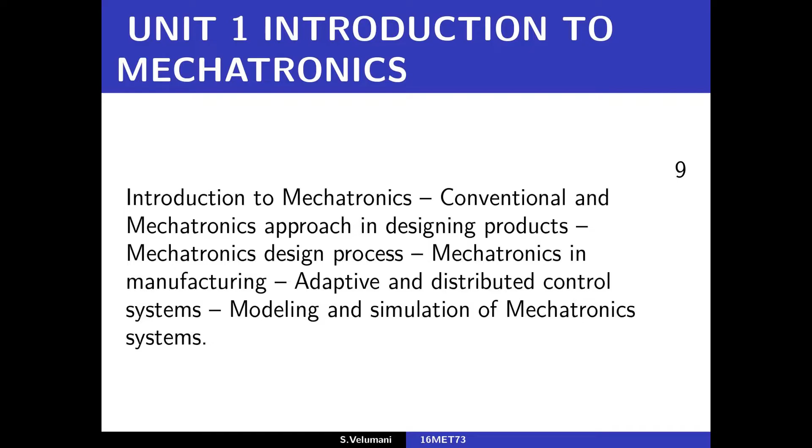Let us see the definition of mechatronics. Mechatronics is normally described as a synergistic combination of mechanics, electrical, electronics, computer and control, which when combined make possible the generation of simple, more economic and reliable systems.

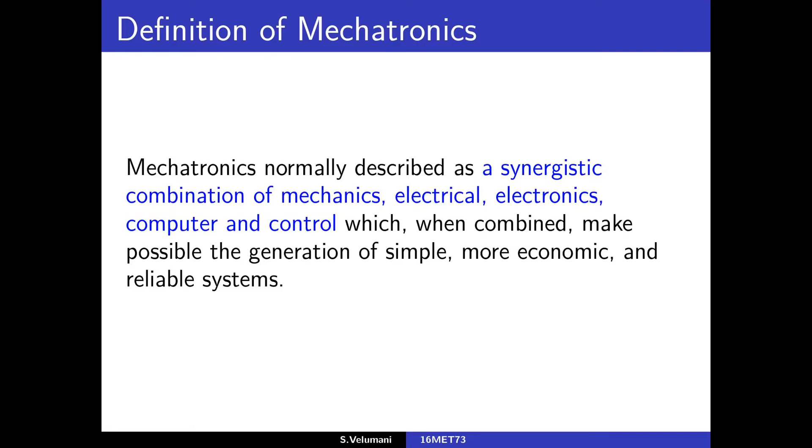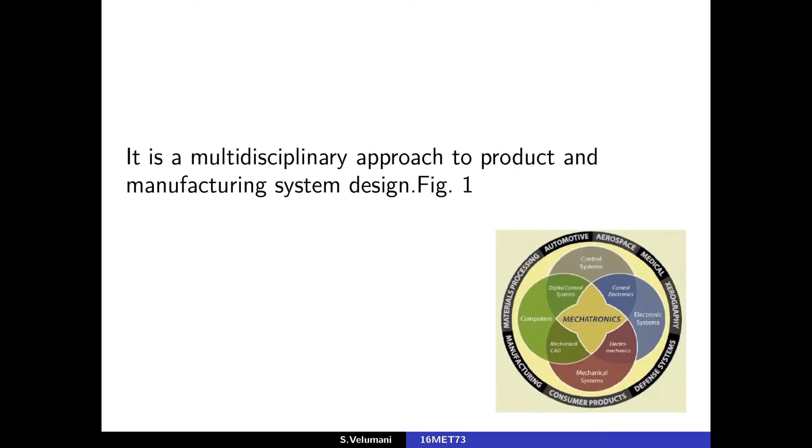The term mechatronics was first coined by Mr. Tetsuro Mori, a senior engineer of the Japanese company Yaskawa, in 1969. It is a multidisciplinary approach to product and manufacturing system design.

See picture 1. Mechatronics can also be termed as replacement of mechanics with electronics, or enhancement of mechanics with electronics.

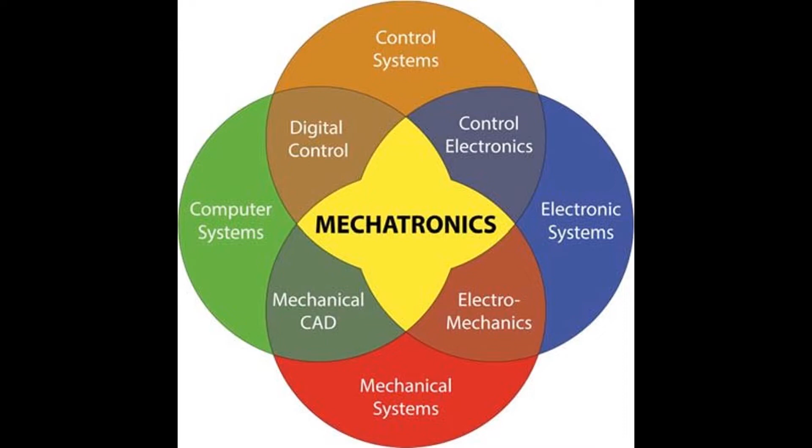For example, in modern automobiles, mechanical fuel injection systems are now replaced with electronic fuel injection systems. This replacement made the automobiles more efficient and less pollutant.

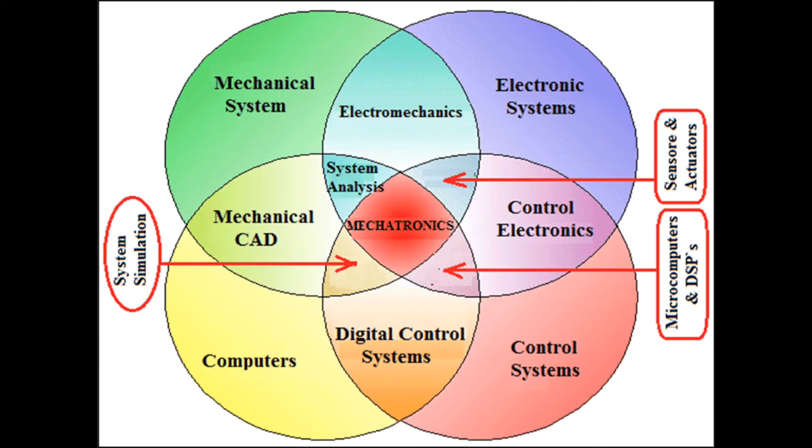With the help of microelectronics and sensor technology, mechatronic systems are providing high levels of precision and reliability. It is now possible to move in the XY plane of the work table of a modern production machine tool in steps of 0.0001 mm.

By employment of reprogrammable microcontrollers and microcomputers, it is now easy to add new functions and capabilities to a product or system.

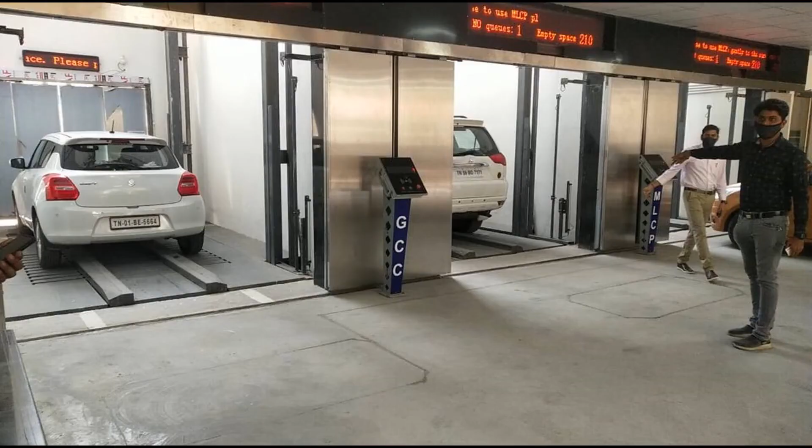Today's domestic washing machines are intelligent, and four-wheel passenger automobiles are equipped with safety installations such as airbags, parking or proximity sensors, anti-theft electronic keys, etc.

Mechatronics brings together areas of technology involving sensors and measurement systems, drive and actuation systems, and microprocessor systems, together with the analysis of behavior of the systems and control. Now you see the picture of basic elements of mechatronic systems shown on the screen.

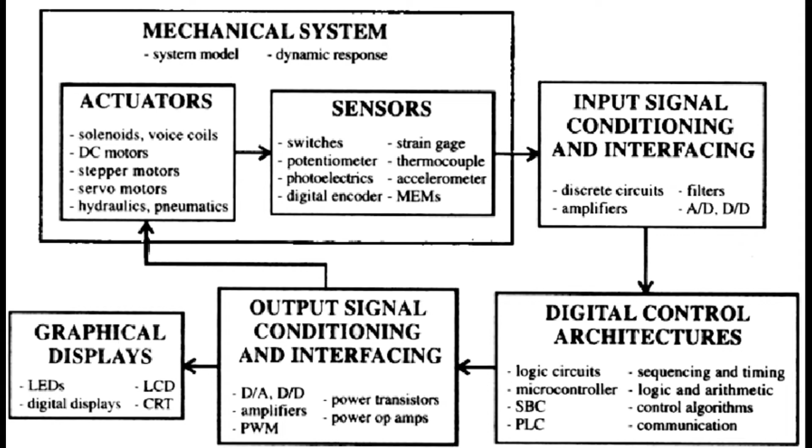Customers are demanding more variety and higher levels of flexibility in products. Due to these demands and competition in the market, manufacturers are striving to launch new or modified products to survive. This is reducing the product life as well as the lead time to manufacture a product. It is therefore essential to automate the manufacturing and assembly operations of a product.

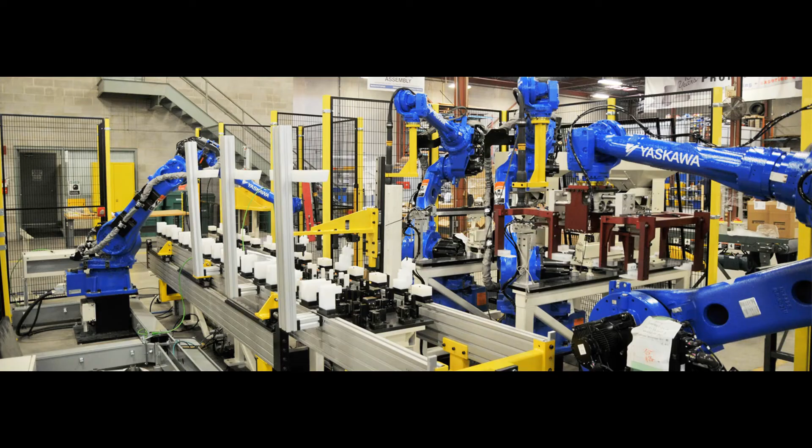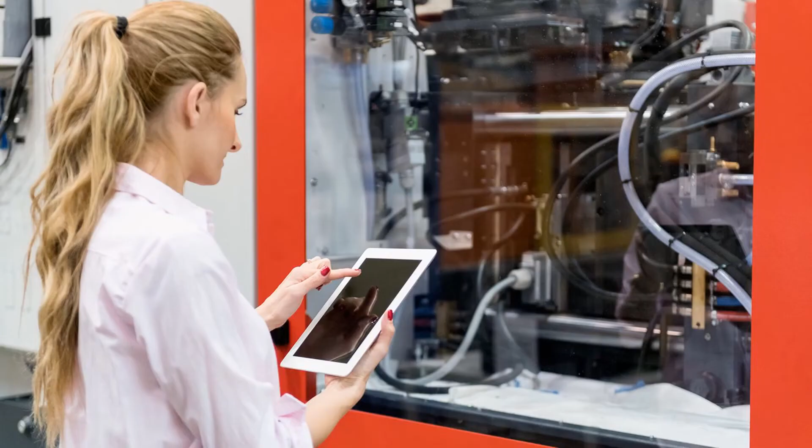In the design process, mechatronics concurrently employs the disciplines of mechanical, electrical, control and computer engineering at the stage of design itself. Mechanical discipline is employed in terms of various machines and mechanisms, whereas electrical engineering uses various electric prime movers.

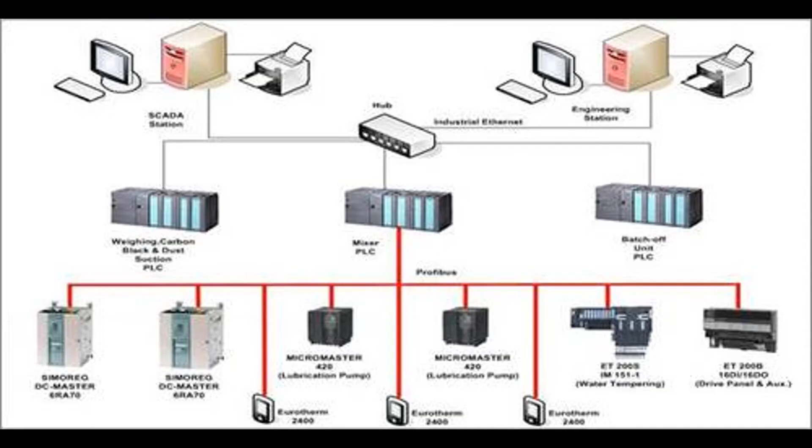Electrical engineering uses various electric prime movers, AC and DC servo motors, and other systems. Control engineering helps in the development of various electronics-based control systems to enhance or replace the mechanics of mechanical systems.

In the design process, computers are widely used to write various software to control the control systems, product design and development activities, materials and manufacturing resource planning, record keeping, market and other sales related activities.

Next, we will see the elaborate steps followed in the design process. There are some sequence of steps to be followed in designing a product or anything.

First, the need. Second, analysis of the problem. Third, preparation of a specification. Fourth, generation of possible solutions. Fifth, selection of a suitable solution. Sixth, production of a detailed design. Seventh, production of working drawings.

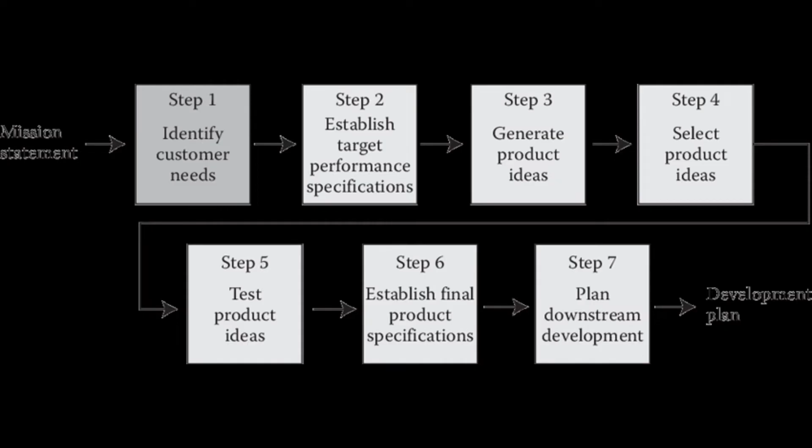First, the need. The design process begins with the need.

Second, analysis of the problem. The first stage in developing a design is to find out the true nature of the problem, that is, analyzing it. If the problem is not defined accurately, it can lead to wasted time on designs that will not fulfill the need.

Third, preparation of a specification. Following the analysis, a specification of the requirements can be prepared.

Subdivision 1: state the problem. Subdivision 2: any constraints placed on the solution. Subdivision 3: the criteria which may be used to judge the quality of the design. Subdivision 4: all the functions and desirable features required for the design.

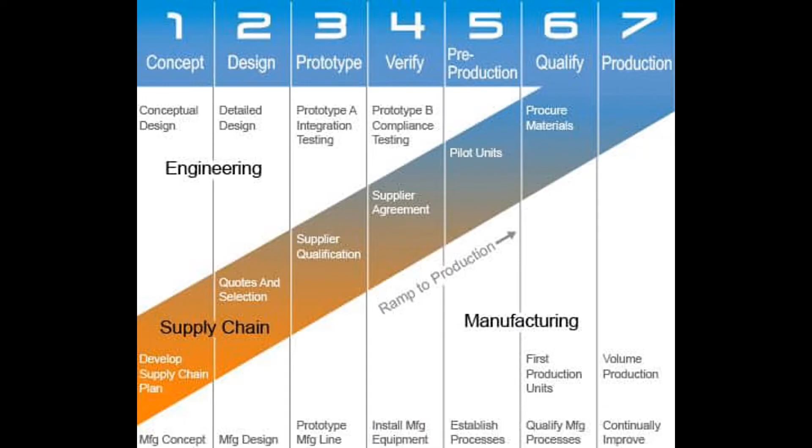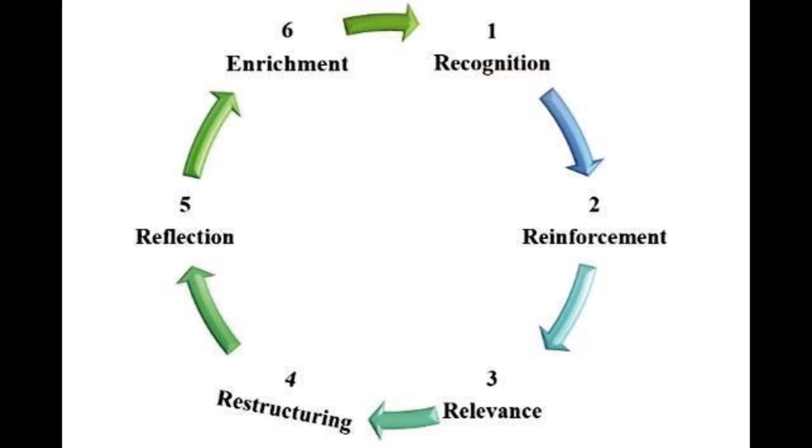Next is the fourth step: the generation of possible solutions. This may also be called the conceptual stage. Outline solutions are prepared, worked out in sufficient detail to indicate the means of obtaining each of the required functions, for example approximate sizes, shapes, materials and costs.

Fifth, selection of a suitable solution. The various solutions are evaluated and the most suitable one is selected. Evaluation will often involve representing the system by a model and then simulation to establish how it might react to inputs.

Sixth step, production of a detailed design. The details of the selected design now have to be worked out, including the production of prototypes or mock-ups in order to determine the optimum details of the design.

Seventh step, production of working drawings. The selected design is then translated into working drawings, circuit diagrams, etc., so that the item can be made.

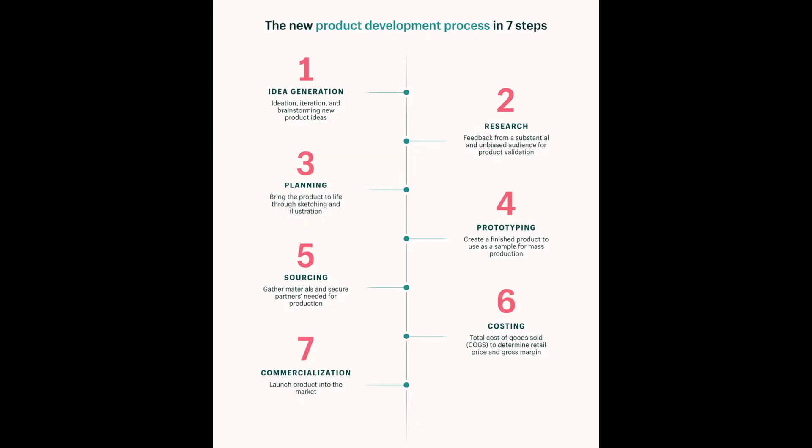Next, we will see the evolution levels of mechatronics. There are four levels: primary level mechatronics, secondary level mechatronics, tertiary level mechatronics, and quaternary level mechatronics.

In primary level mechatronics, electrical signaling and mechanical action are integrated at the basic control level, for example fluid valves and relay switches.

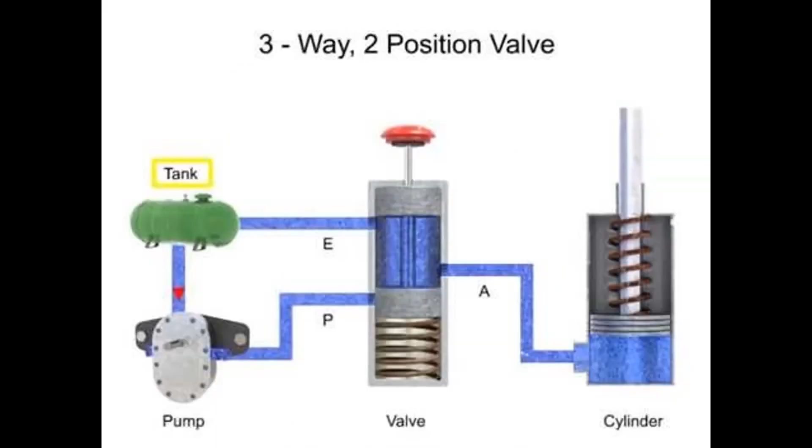In secondary level mechatronics, microelectronics is integrated into electrically controlled devices, for example a cassette tape player.

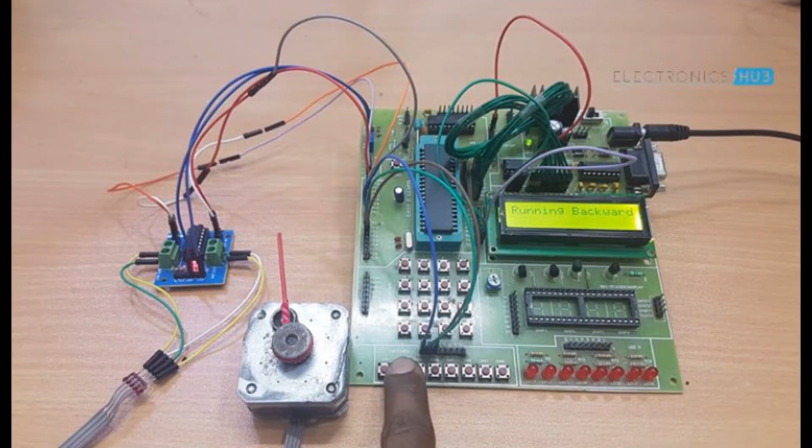Tertiary level mechatronics incorporates advanced control strategy using microelectronics, microprocessors, and other application-specific integrated circuits, for example a microprocessor-based electric motor used for actuation purposes in robots.

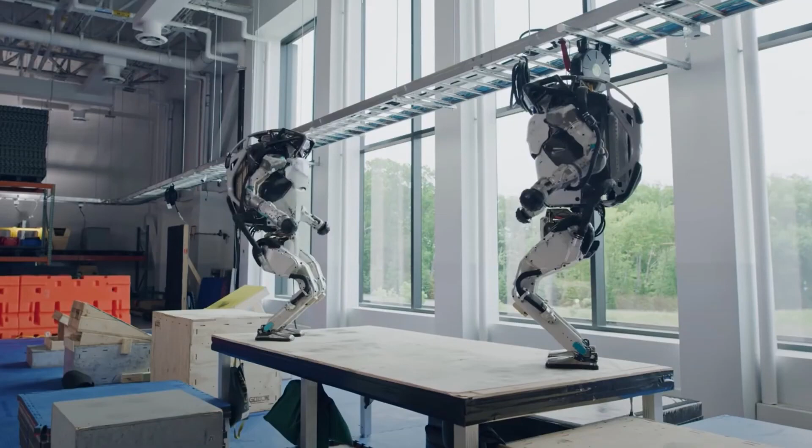Quaternary level mechatronics. This level attempts to improve smartness a step ahead by introducing intelligence, that is artificial neural networks and fuzzy logic, and fault detection and isolation capability into the system.

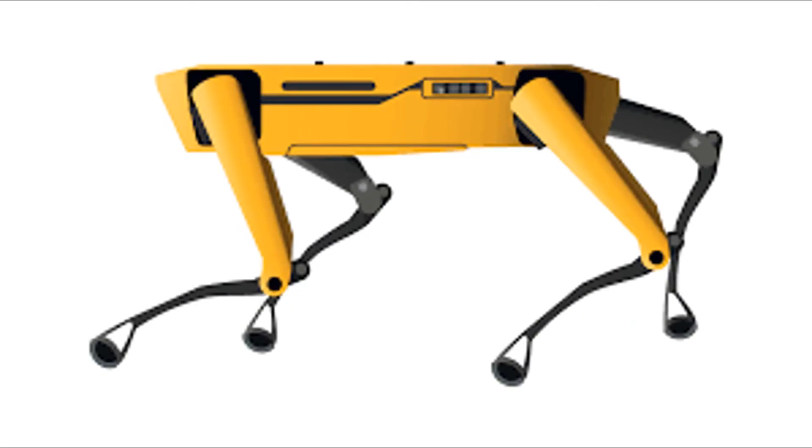Next, we will see the advantages of mechatronic systems. The products produced are cost effective and of very good quality. The performance characteristics of mechatronic products are such that they are otherwise very difficult to achieve without a synergistic combination.

High degree of flexibility. A mechatronics product can be better than just the sum of its parts. Greater extent of machine utilization. We are aware that there are many advantages to following mechatronics, but there are also very small disadvantages.

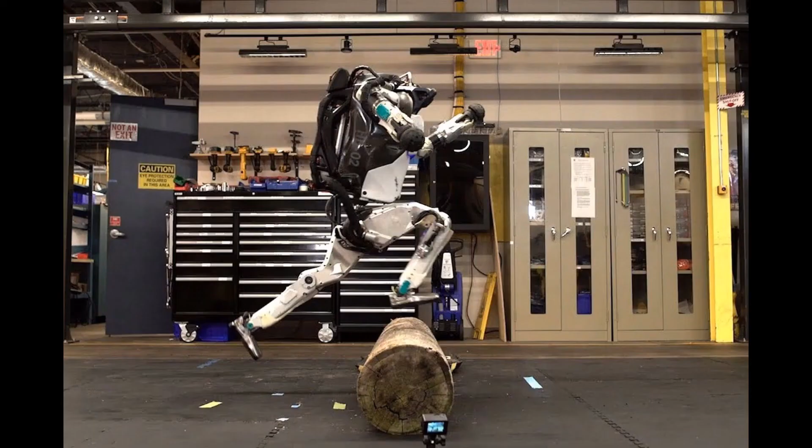Disadvantages: high initial cost of the system, and it is imperative to have knowledge of different engineering fields for design and implementation. Specific problems for various systems will have to be addressed separately and properly. It is also expensive to incorporate a mechatronics approach into an existing or old system.

Introduction to mechatronics.